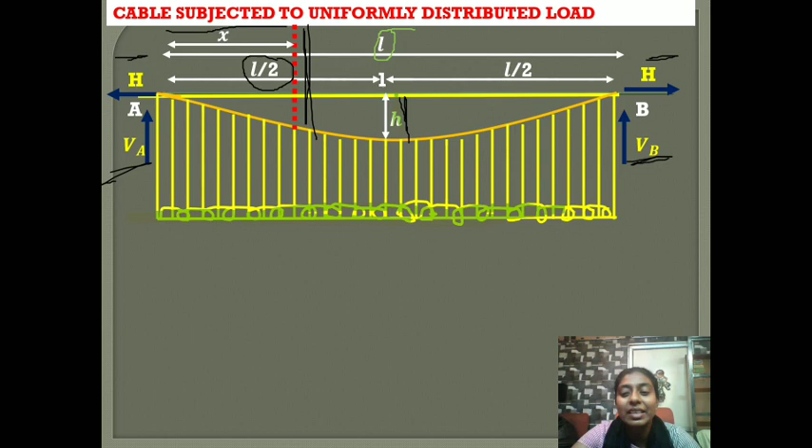The first part is to find the support reactions, that is VA and VB, vertical reactions, and the horizontal thrust H. So we apply the conditions of equilibrium, sigma MA is equal to 0 and sigma MB is equal to 0, that is moments at A and B. We get the vertical reaction VA is equal to WL by 2 and VB is equal to WL by 2, because the UDL is considered as W per unit length. Vertical reaction at A is WL by 2 and vertical reaction at B is WL by 2.

Now the midpoint of the span is taken as 1. So we are taking the moment with respect to this point. The cable has a dip here. So at this point, when we take sigma M is equal to 0, we get VA into L by 2. Now this is anti-clockwise, so minus H into the dip, small h. Capital H is the horizontal thrust, plus this load, that is load in the first half of the span, W into L by 2.

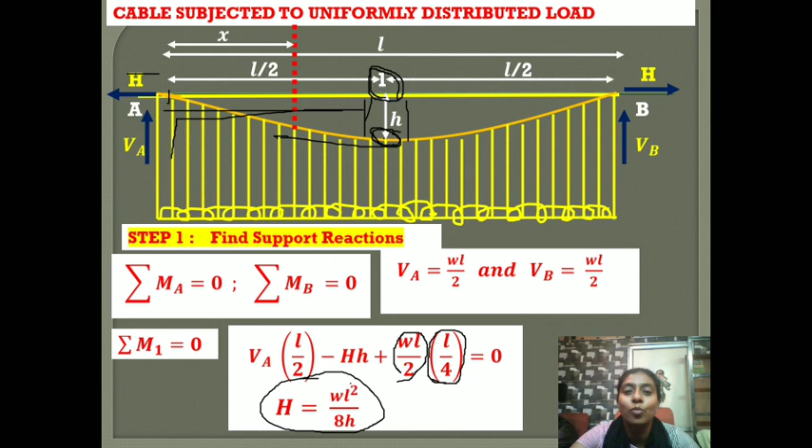Then the distance from the center of the load to the center of the span, this is L by 4. So WL by 2 is the load, W is the intensity of load, L by 2 is half of the distance, and L by 4 is the distance from the center of gravity of the load to the midspan, is equal to 0. So we get horizontal thrust H is equal to WL square by 8h. So vertical reaction at A and B is WL by 2, and horizontal thrust at A and B is equal to WL square by 8h.

Now we will move on to the second step, finding the tension in the cables. So we know, everywhere the cable takes only tension, it resists only tension. Bending moment is 0 everywhere. Shear is 0 everywhere. It takes only tension. So if we take this point, the tension in the cable will be like this.

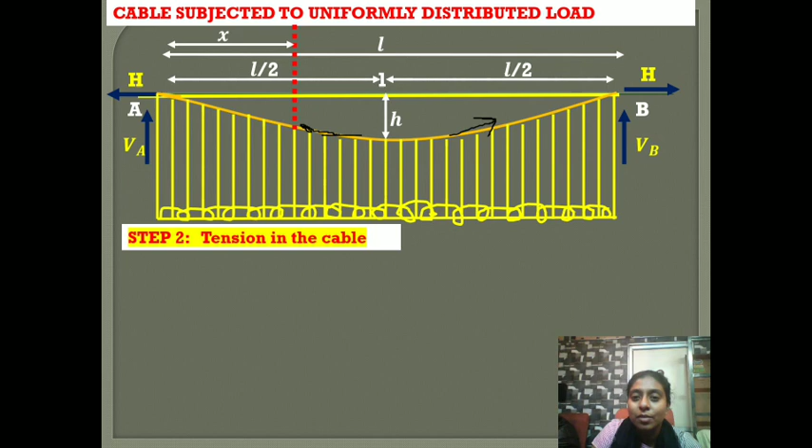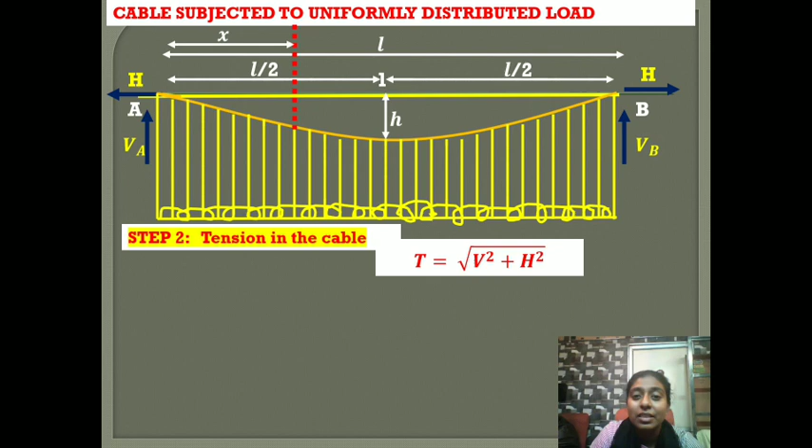This makes an angle of theta with the horizontal, so this can be resolved into horizontal and vertical components. So at every point, the tension in the cable can be resolved into horizontal and vertical components. Since it can be resolved into horizontal and vertical components, the tension in the cable will be equal to square root of V square plus H square, the square of the vertical component plus square of the horizontal component.

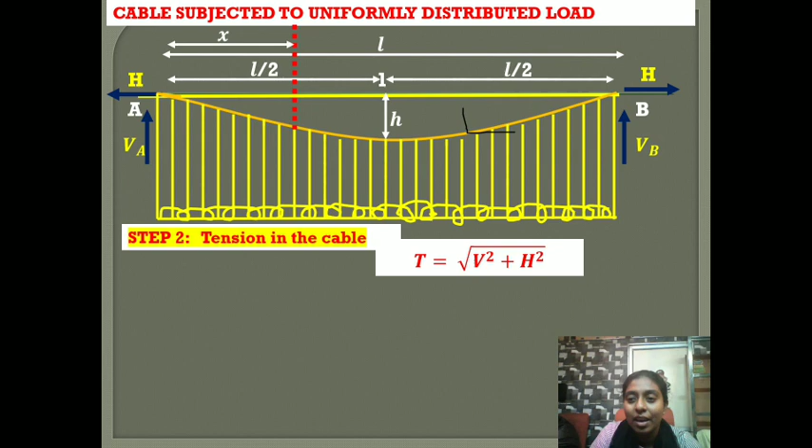Now, we will have maximum tension at the support and minimum tension at the midspan. For maximum tension at the supports, in both the supports the vertical reactions are equal and the horizontal reactions are equal. So both the supports A and B will have the maximum tension when it is subjected to a UDL.

So T max is equal to the square root of V square plus H square at the support. We know the vertical reaction is WL by 2, so it is WL by 2 the whole square plus the horizontal thrust WL square by 8h, the square of that. You simplify it, you get WL by 2 into square root of 1 plus L square by 16h square. Simply, it is the square root of V square plus H square, T maximum.

Now, we will find what is T minimum. T minimum is obtained at the midspan, at this point. Exactly at this point, the tension in the cable will be like this; that is, the vertical component is equal to 0. When the cable is like this, exactly at the midpoint we will have only a horizontal component; the vertical component is equal to 0 because the tension will be horizontal. So there is no vertical component at the midspan.

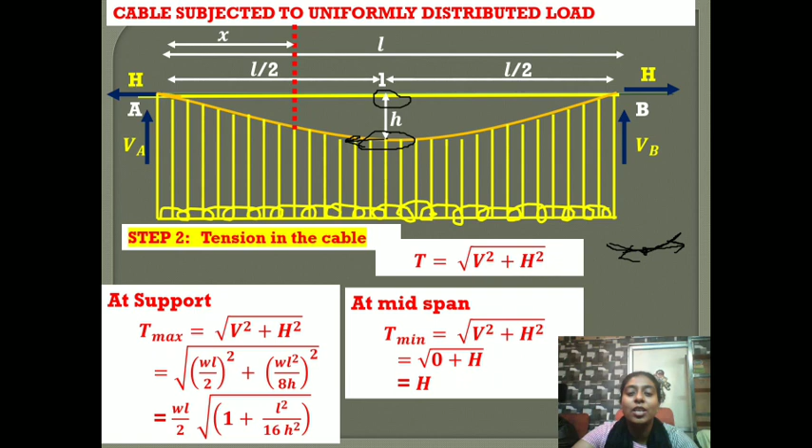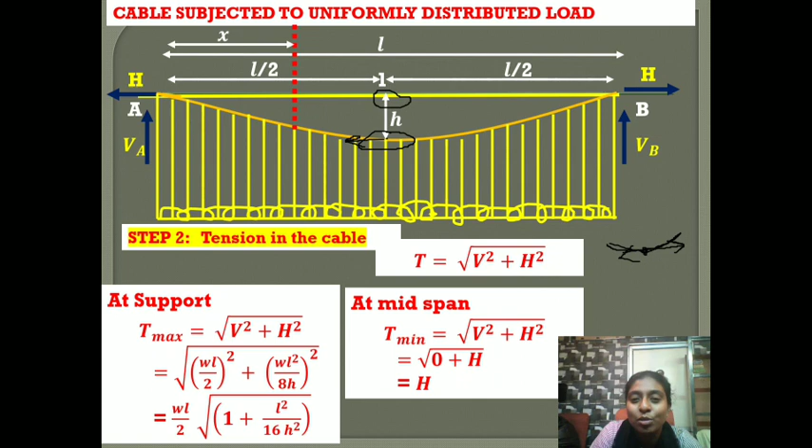So T minimum is equal to H, capital H. It is the horizontal component of the tension at this point. That is T minimum.

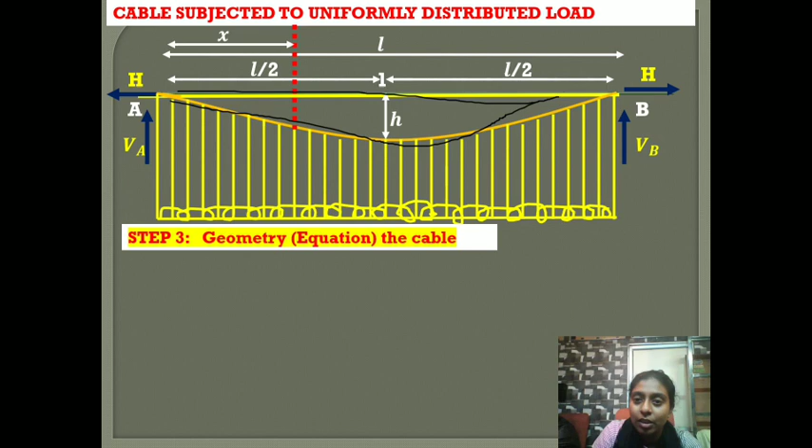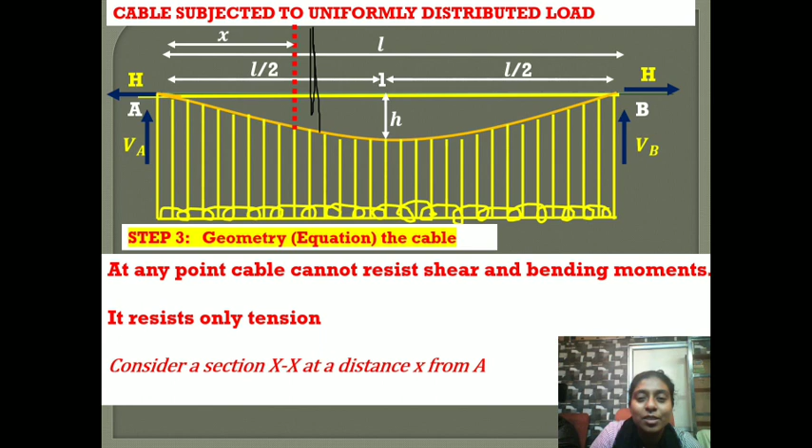Now, what is the geometry or the equation of the cable? When this cable is subjected to a UDL, this is the deflected shape of the cable. What is the deflected shape? That is what we are going to find now. At any point the cable cannot resist shear and bending moments; it resists only tension. Now we are considering a section XX at a distance small x from A.

If this is the tension in the cable, the horizontal component H is equal to T cos theta, and the vertical component will be equal to T sin theta. This horizontal component T cos theta is equal to H, because there are no other horizontal forces to the left of the section. We consider either left or right of the section; for simplification, we consider the left. On the left of the section there is only one horizontal force, the horizontal thrust H, so T cos theta is equal to this horizontal thrust.

Now the vertical component is T sin theta, because the tension is taken as T. This vertical component is equal to the summation of all the vertical forces to the left of the section. See, the horizontal component is equal to the sum of all the horizontal forces to the left of the section, which is only H. Now, the vertical component is equal to the sum of all the vertical forces to the left of the section.

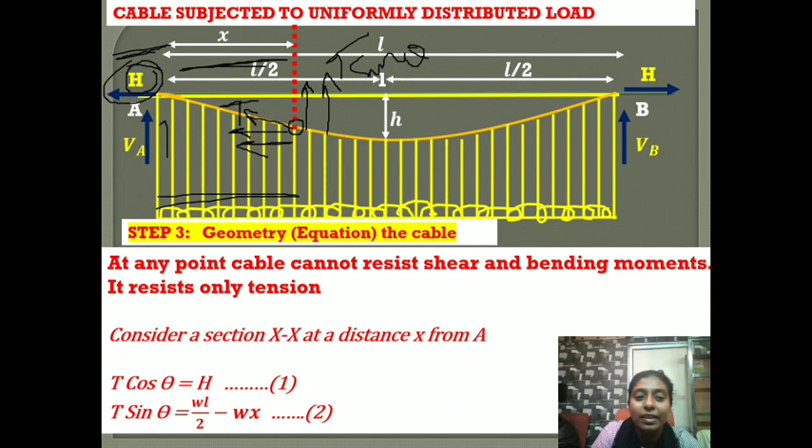So V is equal to T sin theta, that is equal to WL by 2, this VA, minus the downward load on the left of the section, that is small w into x. We take that as equations 1 and 2. Now dividing equation 2 by 1, we get T sin theta by T cos theta, that is tan theta. Tan theta is nothing but the slope of the cable, which is equal to dy by dx.

Now we know dy by dx. T sin theta is nothing but V, the vertical component of the tension, and T cos theta is nothing but H, the horizontal component of the tension. So T sin theta is equal to WL by 2 minus wx, and for T cos theta we substitute H. This is equal to tan theta, which is dy by dx. So we cross multiply and get dy is equal to WL by 2 minus wx, by H, multiplied by dx.

So now we can integrate this. When we integrate, we get y = 4hx(L − x)/L². So y is at every portion, that is, this is y, this is y: y1, y2, y3, y4, etc. So this is the equation of the parabola.

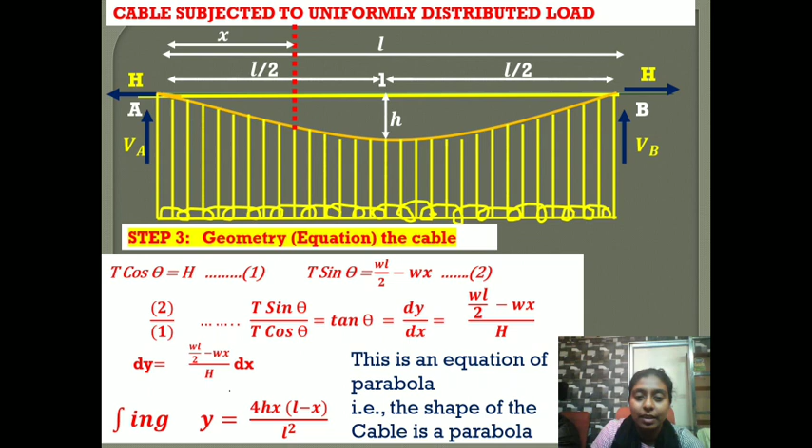Since this is an equation of the parabola, the shape of the cable is a parabola. So the shape of the suspended cable when it is subjected to a UDL will be a parabola. And y is the equation of the parabola: the equation of the cable is y = 4hx(L − x)/L².

Now we will find the length of the cable. This is the length of the cable, capital L. For finding this L, we will take a small ds at every portion. For example, we will consider this small triangle. This portion is taken as ds, this is dy, and this is taken as dx.

So in this small triangle, ds = √(dx² + dy²). Taking dx out, we get ds = dx √(1 + (dy/dx)²). Now in step 2, we have already seen what tan theta is, that is, dy/dx. Substitute dy/dx, then integrate and you will get the value for s.

I repeat, substitute the value for tan theta, that is dy/dx, which we have seen in the last section, and integrate. We get s equal to a value. Then integrate s from 0 to L to get the total length of the cable, which equals the span length l plus 8h²/3l, where h is the maximum dip at the center.

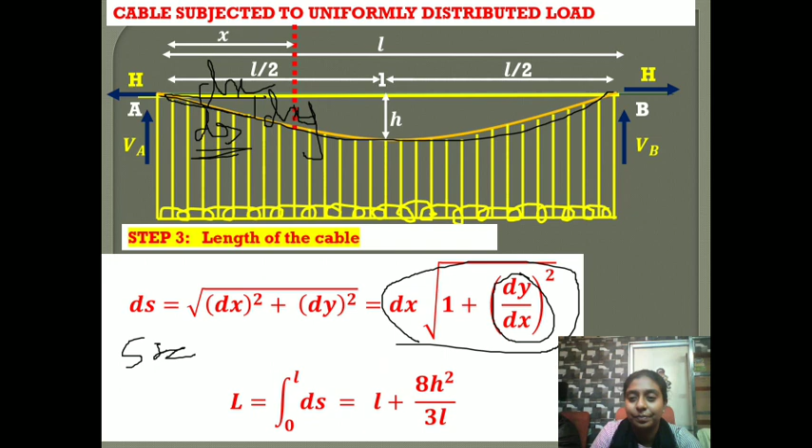So these are the important conclusions. The vertical reaction is wL/2, the horizontal thrust is wL²/8h, and H = T cos theta anywhere in the cable. The horizontal component of tension equals the horizontal thrust, because anywhere in the cable, taking either the left or right of the section, the only horizontal force is the horizontal thrust.

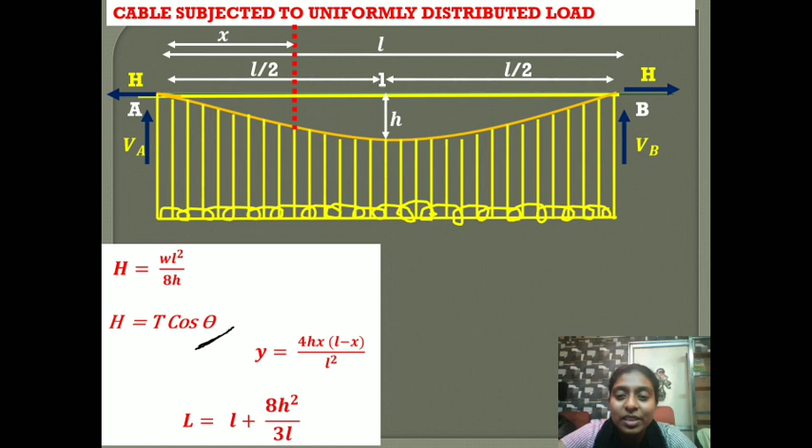T cos theta is equal to the horizontal thrust, the horizontal reaction at the support. From this you can find theta, the angle the tension makes with the horizontal. Now y is the equation of the cable and capital L is the length of the cable. So that's all. We will see one problem for practice.

A light flexible cable 18 meter long is suspended. So you have a cable 18 meter long, supported at two ends at the same level. The supports are 16 meter apart, so the span length is 16 meter. The cable is subjected to a UDL of 1 kilonewton per meter of horizontal length over the entire span.

Analyze the cable. Find the vertical reactions using sigma MA = 0 and sigma MB = 0. Then take moment at this point equal to 0 and find the horizontal thrust. Take the tension in the cable and resolve it into horizontal and vertical components, so H = T cos theta. From that we get theta = 40.89 degrees.

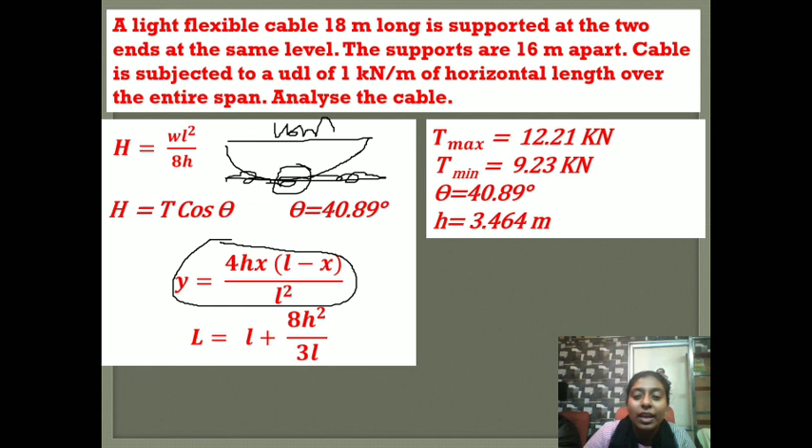Now we know the length of the span and the length of the cable. From that find small h, then find the equation y in terms of x. The answers are T max = 12.21 kilonewton, T min = 9.23 kilonewton, theta = 40.89 degrees and h = 3.464 meter. Hope you understood the problem.

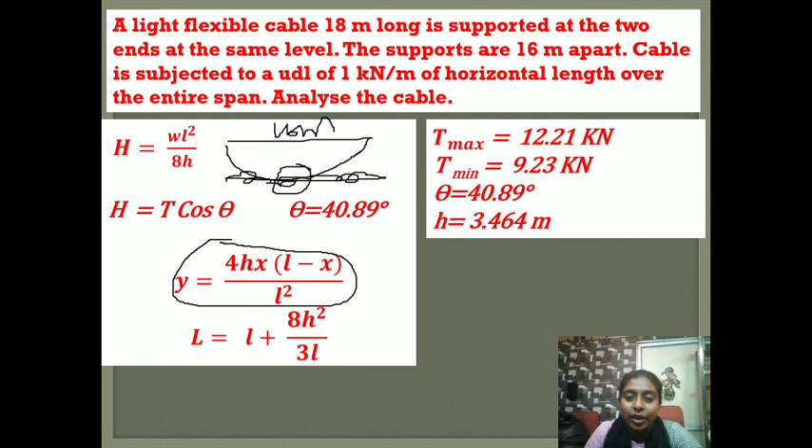So far we have seen the components of the suspension bridge and the cable, and how the cable is analyzed when subjected to concentrated loads and to a uniformly distributed load. In both cases the supports are at the same level. In the next class we will see the next type of problem.